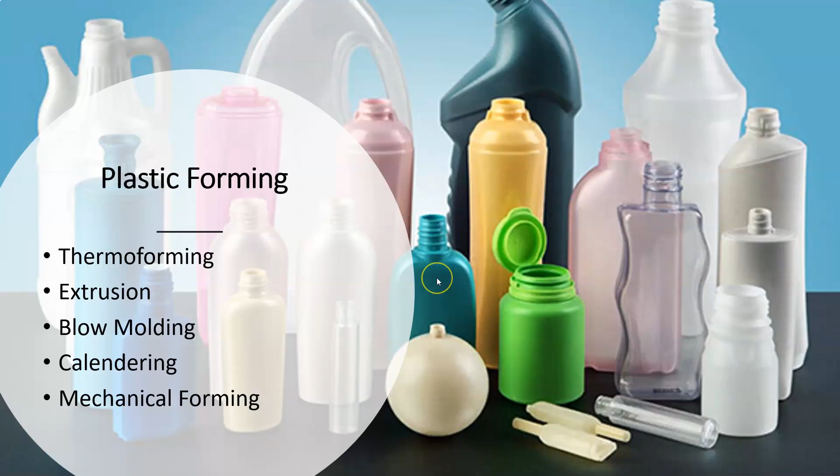Okay, let's continue with our look at forming operations, and we're going to move from metals now to plastics. There are 5 basic forming operations for plastics that we're going to look at in this chapter: thermoforming being the most common, extrusion being up there as well, blow molding, calendering, and mechanical forming.

So first up is thermoforming. We're going to be using a thermoplastic sheet. Remember, thermoplastic is the plastic that can be heated up and allowed to cool and then reheated, so we have that ability to shape it, rather than a thermoset, which is going to degrade with the application of heat and won't work as well in a thermoforming operation.

Thermoforming is extremely common. You can see it in the everyday kitchen and food containers that we use all the time. In the figure here, you can see the cups and the plates and all this stuff.

It's a very simple process. It doesn't require high forces, it doesn't require high heat, and it has a very short lead time. It doesn't require special types of machines or dies or anything like that, so it's generally very inexpensive. It has a high rate of production if you needed to make things very fast, and you can also have some variability in its textures, finishes, and colors. So it's a very common and useful production process for plastics.

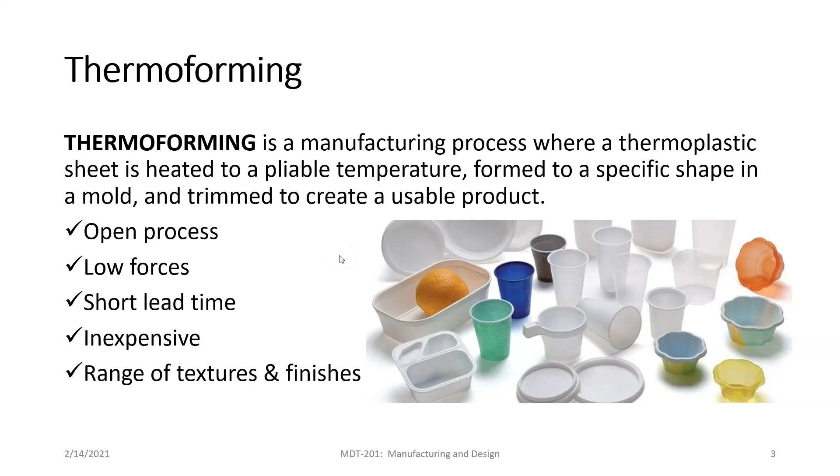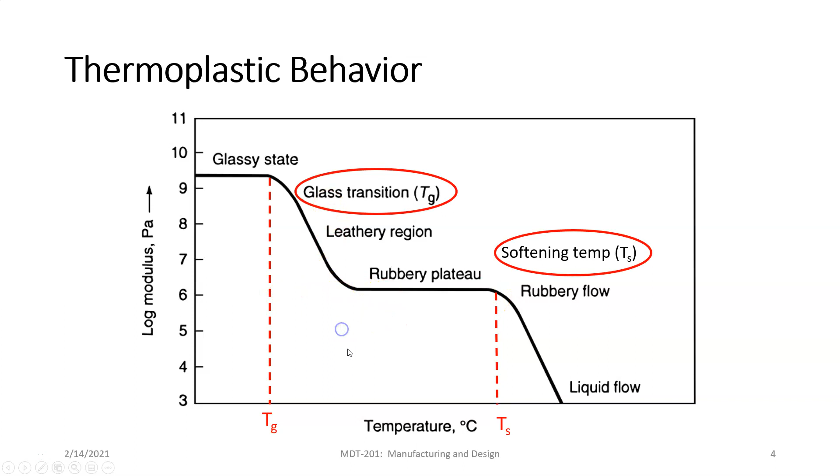So basically for thermoforming, what we want to do is operate within this range, in between the glass transition temperature and the softening temperature. That is, we want to raise the temperature just enough so the material becomes flexible, but not so high that it can't hold its shape. That's our thermoforming temperature range.

We also want a large difference between the glass transition temperature and the softening temperature. The larger this temperature range separation is, the easier it's going to be to operate. If the glass transition temperature is very close to the softening temperature, we run the risk of going past the softening temperature with imprecise control of temperature, messing up our flow and our plastic.

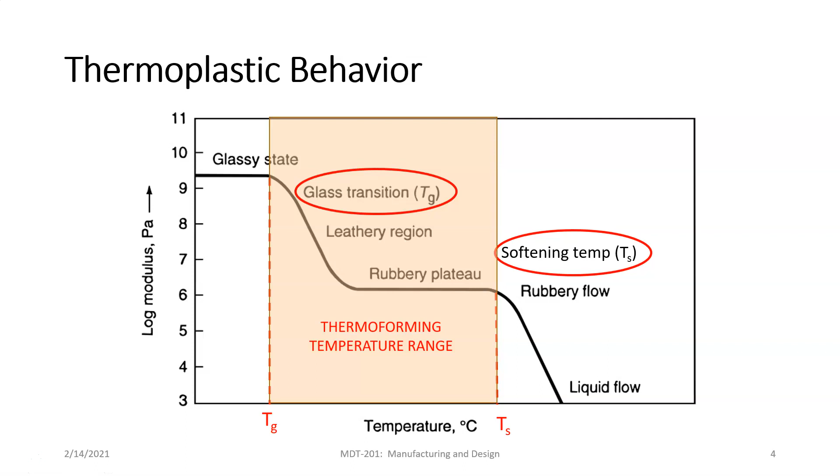Understand that the ideal plastic or thermoplastic is probably not something that exists, but these are parameters that we work from. So typical plastics that are very well suited to thermoforming include plastics with a high molecular weight and amorphous plastics. So that includes polystyrene, ABS, polyvinyl chloride, PMMA, and polycarbonate.

Those difficult to thermoform include the semi-crystalline plastics: high density polyethylene, polypropylene, and PET. Those are difficult but not impossible to thermoform.

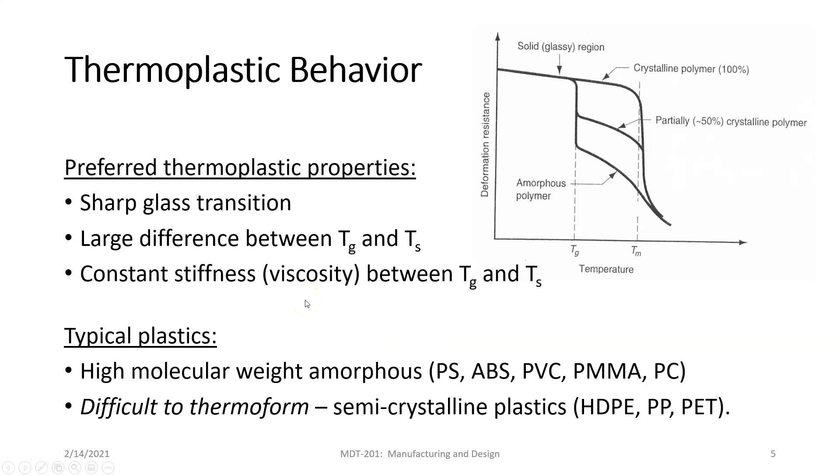So there's a couple of rules for thermoforming when you're trying to set up a thermoforming operation. The first one is the conservation of volume. Just like all forming operations, we're not talking about removing material or adding material. The amount of material we start with is going to be more or less the amount of material that we finish with. So that means we have volume conserved.

So if we start with a certain volume of plastic, we're going to end up with a certain volume of plastic. And that has to be taken into account given the change in geometry, because that's really what we're talking about. We're going to start with one volume of plastic in a geometry, and then we're going to change that geometry, but the volume isn't changing. So we have to understand that very well.

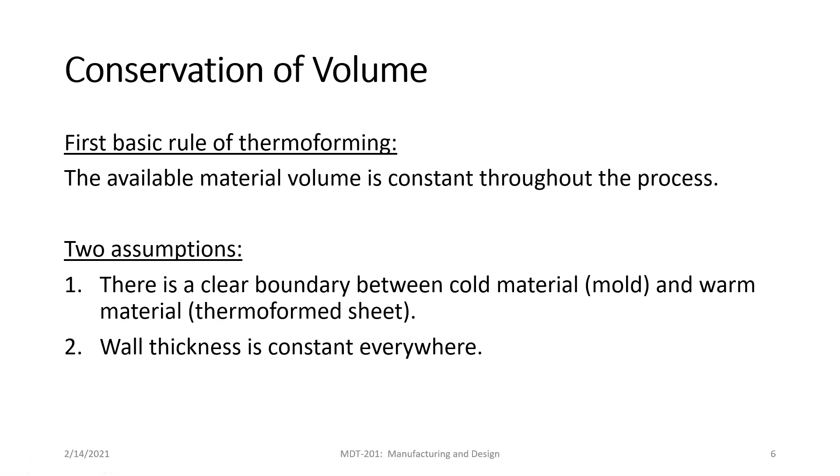A couple of other assumptions help us along that way. We have a clear boundary between the cold material of the mold and the warm material of the thermoform sheet, and we'll see this in figures and in the videos that you watched. And then we also make an assumption that wall thickness is constant everywhere.

And so when we talk about the law of conservation of volume, we're dealing with average wall thicknesses, because we can't really go in, except after the fact, and predict exactly what the thicknesses are going to be, and then therefore the volumes. So constant wall thickness is almost impossible to realize especially for very sharp radii.

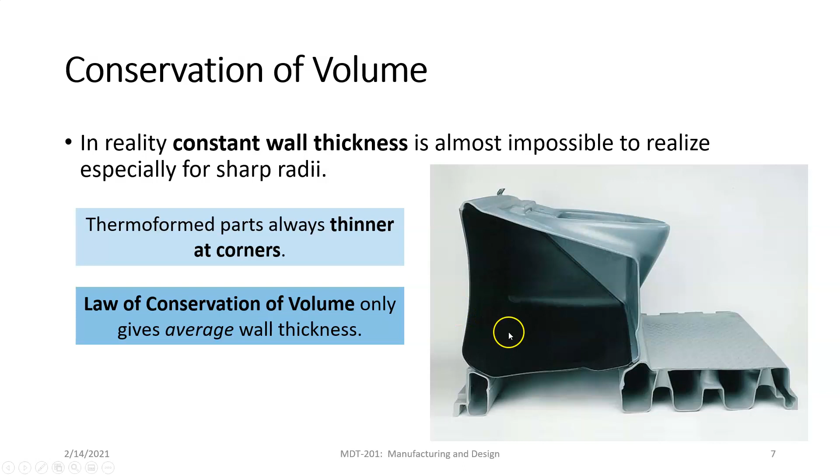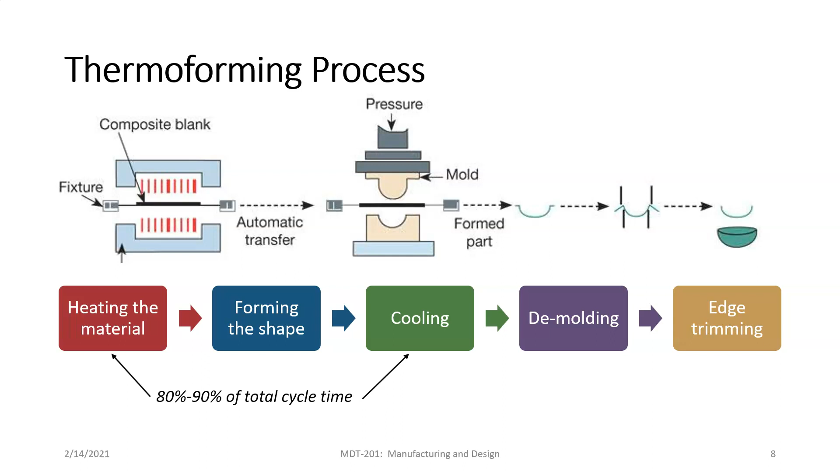Looking at the different thermoforming processes, we have a positive forming process, where the sheet is draped over a positive mold. We call this a positive mold because, like a cylinder is a positive cylinder, like a pin is a positive cylinder, the mold is something that we can touch. So we can touch this mold shape, and that makes the shape.

The other option here is a negative forming operation, called that because we're using the negative mold, right - we're using a hole in the shape of what we want to create. This is a negative because you can't touch the negative of the mold, the hole, so to speak.

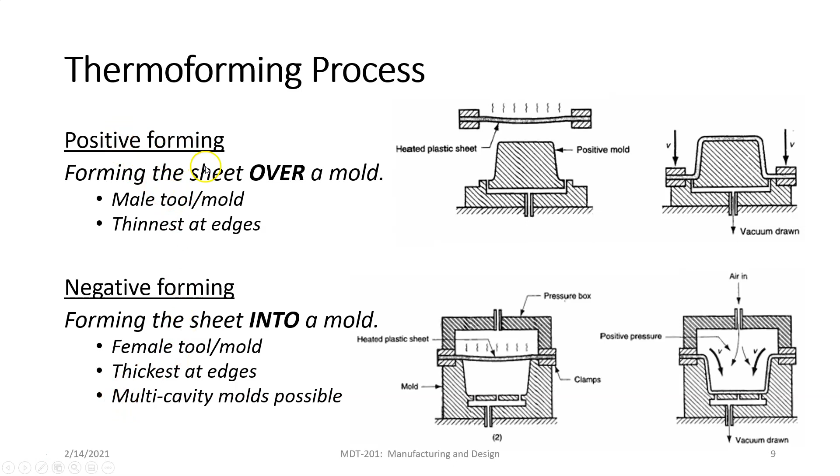Notice in both of these situations, we're going to use airflow. With the positive forming, we're going to use a vacuum - you can see the vacuum here. The vacuum is going to help pull the pliable plastic sheet over the positive mold, pulling it down. With the negative mold or negative forming process, we're going to use a positive air supply on top to blow down, and then a negative or vacuum on the bottom to help pull it into shape. So those are the two different types of thermoforming processes: positive forming and negative forming.

This is, I think, a little bit more of what we talked about, just the process. You have the preheated plastic sheet, it's placed down on the shape and then clamped. And then we have air pressure that blows in while a vacuum pump pulls air out, and it's going to form it to the sides.

This is very suitable to complex shapes because of the bidirectional air - you're using a positive airflow above and a negative airflow below. You're really able to suck and blow that shape into the mold crevices so that you get really good shape adhesion and dimensional stability that way.

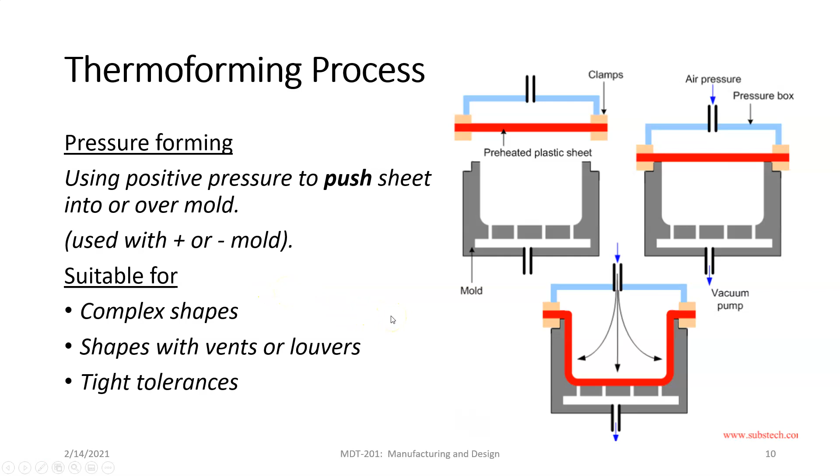This is more of the same, just another way to look at it.

Moving on to the cooling stage - this is where the hot sheet is pressed against the cold mold, so it's going to instantly start to cool when pressed against the cold mold, cooling below the glass transition temperature. Cooling time depends on the local part thickness, meaning the thickness of the part at the specific areas where it's in contact. A thicker cross-section is going to cool slower than a thinner cross-section. You need to be aware of that in a thermoforming operation, because you don't want to remove it too fast, or you'll have areas of the part that have solidified, but areas that are still flexible.

And then that's just going to mess up the shape. You also have to consider the type of plastic and also the mold material. Wooden molds can take longer to cool, right? They're more insulative. Aluminum molds with intercooling, meaning water running through to cool the dies, are going to be for very quick cooling and high volume production. Obviously, these types of molds with intercooling cost much more than wooden molds where you're doing prototyping in short runs.

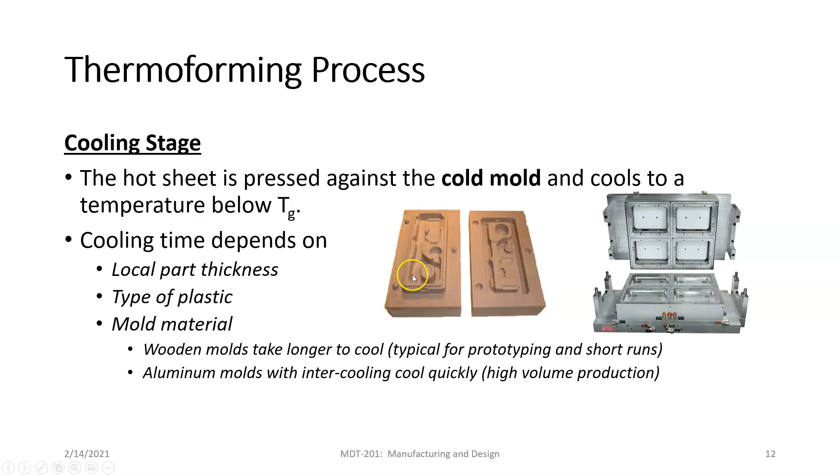One thing you do need to note, though, is that whatever surface exists on the side of the mold cavity, you're going to pick that surface up on your plastic part.

Pre-stretch forming is kind of a variation on the negative and positive forming, and this is where the heated sheet is blown away from the mold, pre-stretching it before the forming stage. The reason why you would do this is because you really want to get kind of a bounce. If you have an intricate shape, like in this example with a lot of contours and different curves, and you don't do a pre-stretching operation, the thermoform sheet will touch the mold cavity and instantly start to cool, and that may inhibit how it's able to drape across the rest of the geometry.

So this pre-stretch actually increases its stretch, so that it becomes longer. You can see that this shape, this arc, is longer material than if it was just straight across. So now we have additional material that we've gotten out of the situation through this pre-stretch. We blow the air up, we get a pre-stretch, and then we apply pressure and blow the air down, and also use vacuum to pull it to the sides to get that shape.

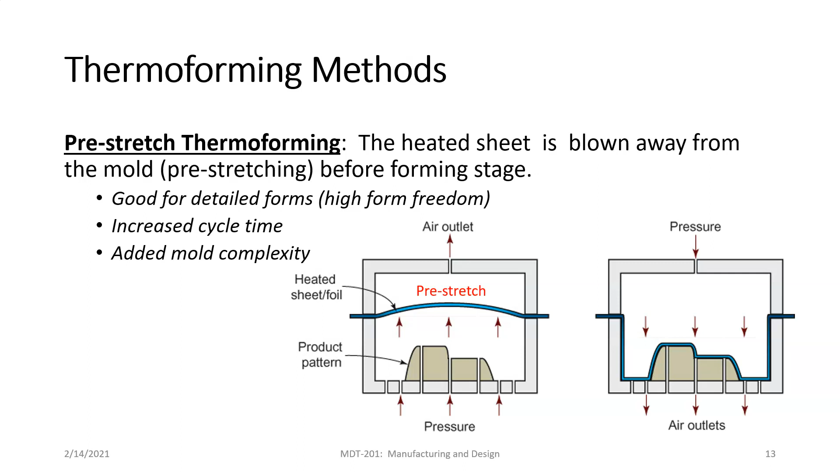So this is done with highly complex molds. Obviously, it increases cycle time. When we're talking about high volume production, understand that seconds or even half seconds can add up when you're running 10,000 or 100,000 parts times a half a second - that takes minutes away, and maybe even more than that.

Plug-assist forming is kind of a combination of a positive and negative forming operation. So we have a negative forming operation - the sheet is stretched over a negative die, a negative mold. Then we use this plug to push it down. This helps us have a lower cycle time because we're forcing it in. It also aids in deep forming - if the mold is very deep, we might have trouble getting the sheet to pull down into it quickly or accurately, so the plug can really help with that.

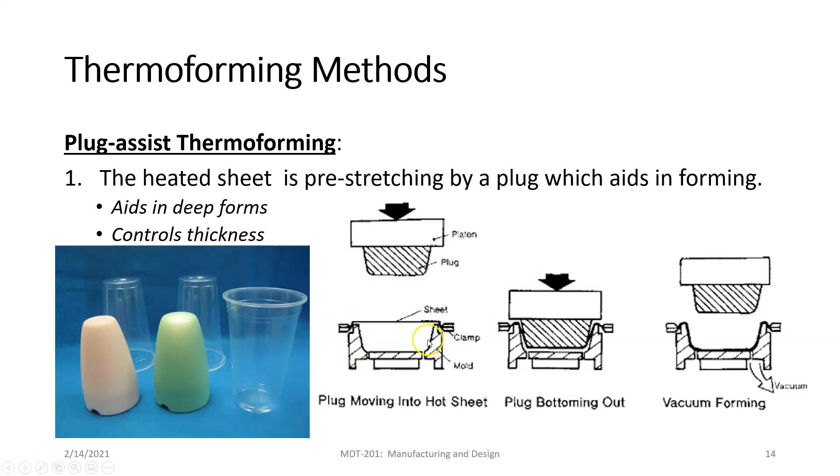It also controls thickness. Now, going back to our concept of the mold cooling the plastic as soon as it touches it, understand that we can also have a mold that is heated to some extent, so it doesn't right away cool the shape down, and it aids in getting it stretched out.

In plug-assist thermoforming, the heated sheet is blown - this is kind of a combination of plug-assist and pre-stretch. The heated sheet is blown away from the mold, so we're pre-stretching it. It comes into contact with the cold plug and sticks there because of the difference in temperature, and then it's forced down with the plug.

Now, what you get here - remember that as soon as the temperature of the plastic drops below the glass transition temperature, it stops being able to stretch.

So if we don't want this area right here to stretch any further, on the pre-stretch, when it hits the cold plug, it's going to stop stretching. And all the remaining stretch is going to be carried out in the periphery of the part.

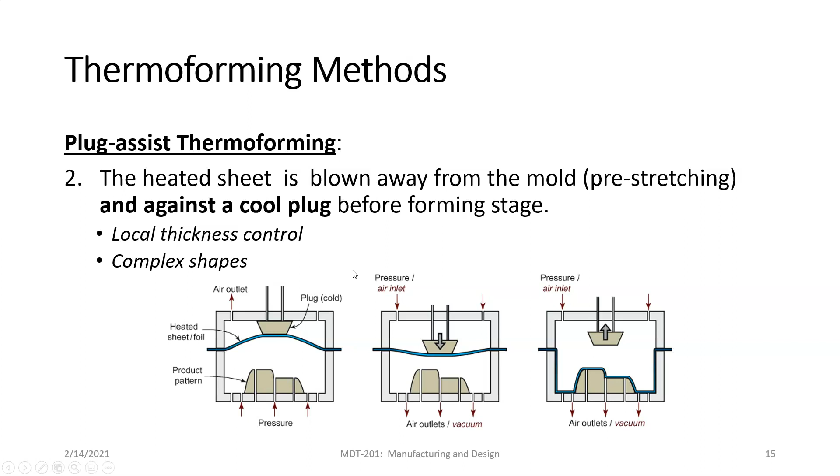This is really a process, thermoforming, where you're going to run through a lot of trials. Understand that you have a lot of tools you can choose, a lot of different production processes, but this is something where you're going to have to go through trials. You're going to be making parts, cutting them in half to look at them, trying to ascertain where thicknesses are thin and thick on the walls, and how you can adjust that. So it's a simple process, but there's a lot of complexity once you get into the nitty-gritty.

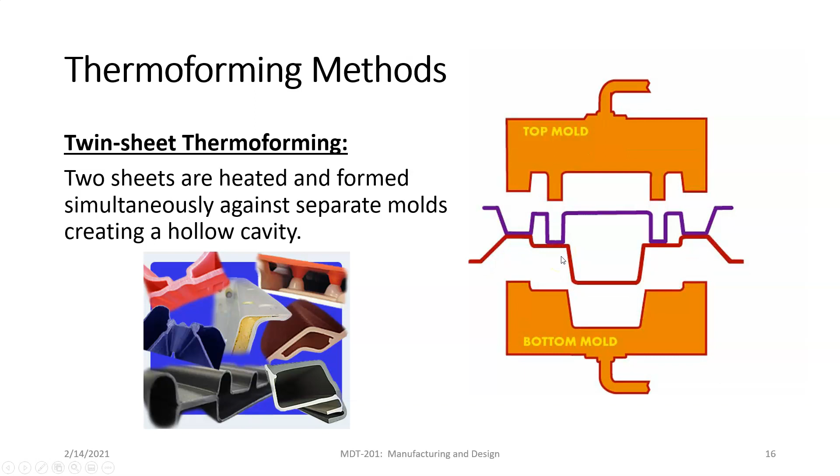So we can make airtight plastic containers. These are used in boats. These are used in coolers. You might even be able to fill this with an insulating material after the fact. So this is thermoforming using two heated sheets and a different upper and lower die that are going to make these shapes come together.

Now moving on to extrusion blow molding. This is really a type of thermoforming, but it's thermoforming to create specific geometry. In this case, think water bottles - those plastic water bottles that everybody has, that you see them all over the place now. These are done using this process.

So the first step in this process is we heat the plastic and we extrude it into a hollow tube. The plastic is going to come in here, it's going to be heated, and we're extruding it down into this hollow tube. This hollow tube is called a parison.

Then we're going to clamp the sides together. So the sides come together, and we're going to pinch off the bottom. So now we have a hollow plastic tube that's heated.

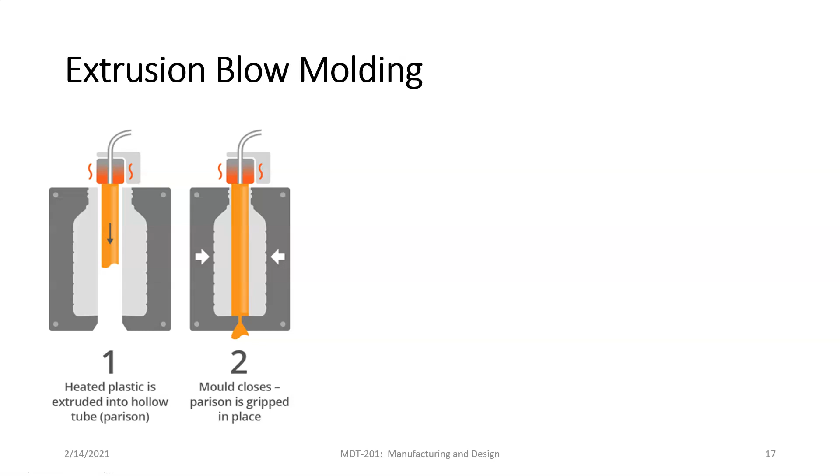Then we're going to inject air. This is the air tube. We're going to inject air into this hollow plastic tube where the bottom is sealed. The air is going to pump out the plastic and it's going to form into the bottle-shaped die.

So there, fourth step, we fill and it fills the die. And then we're going to open the die and we're going to release the now formed plastic bottle and trim off any excess from the bottom and the top.

Now, what's interesting is if you have some water bottles around, go and have a look at them. Look at the bottom of the water bottle. See if you can find that little thing - it almost looks like a navel, like a belly button. Go and look at the bottom and see if you can find the area where the blow mold was pinched and then cut off the extra shape. See if you can find that. And there is your finished product.

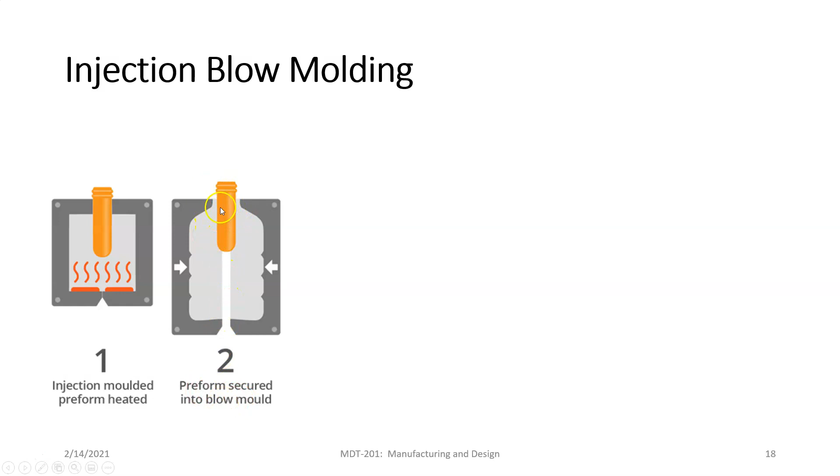There's some variation here. This is another process where the injection molded preform is heated in this. Then we're going to secure the mold, the plastic in the mold, inject the air in it, blow it up again into the mold shape, and then we have the finished bottle.

What's the difference between this and the previous one? Well, notice that this has no extra shape on the bottom. So in this case, we're also not trimming the top, so there's no trimming. So in this case, what we're starting with is a preformed blank that is the exact amount of material that we need to create the bottle.

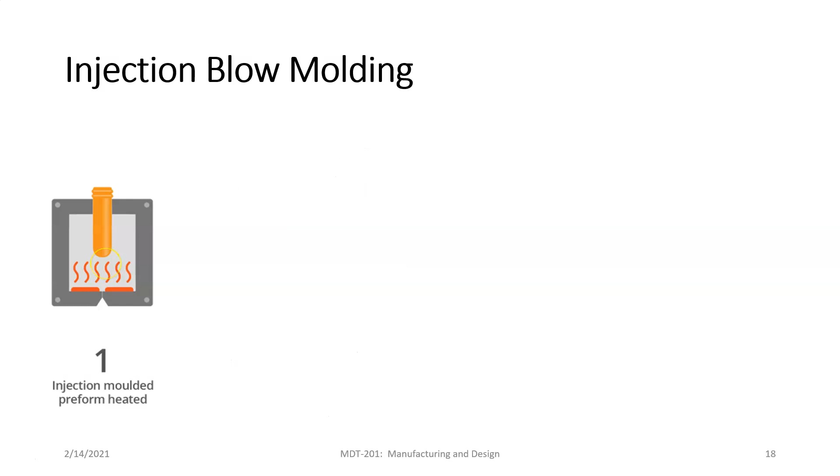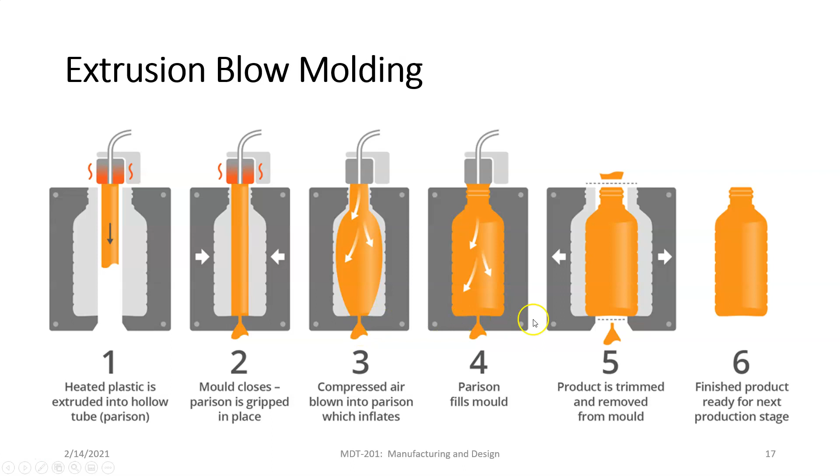As opposed to this, which has an extruded shape that's kind of a continuous extrusion. We're just going to pinch it off when we have enough, a sufficient amount, and then we're going to trim it later. So with this type of operation, there's no trimming involved. Same process, just different in what we start with.

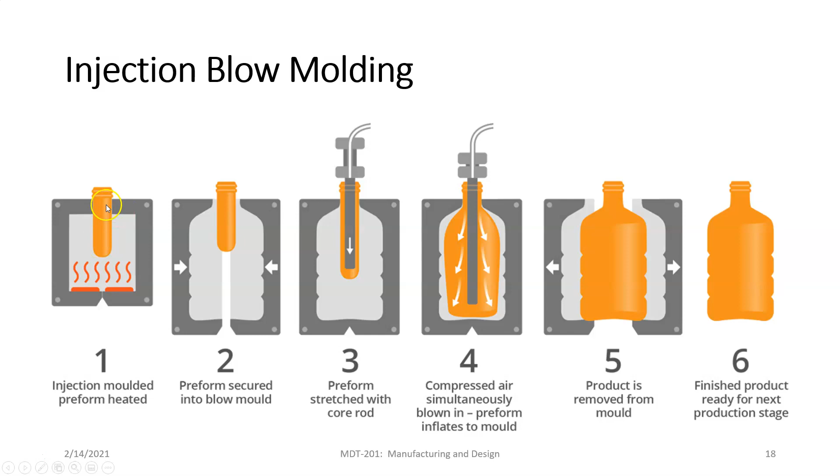And that's it. So in the next operation, we'll look at the last topic, which is forming powdered metal. See you then.